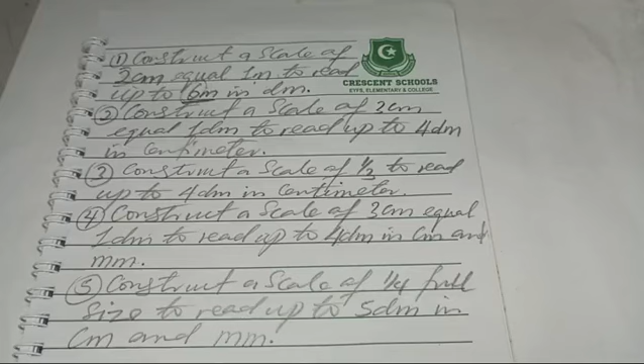In this video, we'll be solving question number 2 from the series of questions we started earlier. It says construct a scale of 3 centimeter equal 1 decimeter to read up to 4 decimeter in centimeter. So we have decimeter and centimeter, meaning it is a plane scale, and it can read up to 1 decimal place.

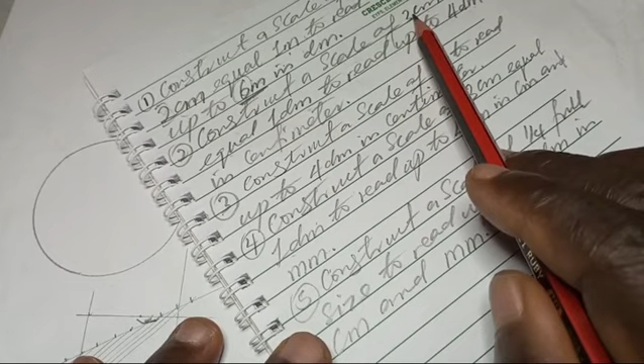The first thing we're going to do is determine the length of scale. The ratio is 3 centimeter to 1 decimeter. Ratio is equal to 3 centimeter to 1 decimeter - confirm again, 3 centimeter to 1 decimeter. Yeah, that's it. So therefore the RF, representative fraction, will be 3 centimeter all over 1 decimeter.

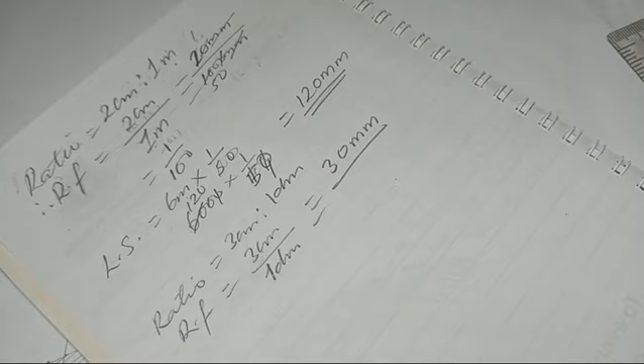Now convert everything to millimeter. This will be 30 millimeter all over 100 millimeter. So we cancel the 0s, and we have 3 over 10.

So what will now be the LS, length of scale? LS will be the maximum measurable length on the scale. What's the maximum measurable length? It says to read up to 4 decimeter, so this is the maximum measurable length, 4 decimeter.

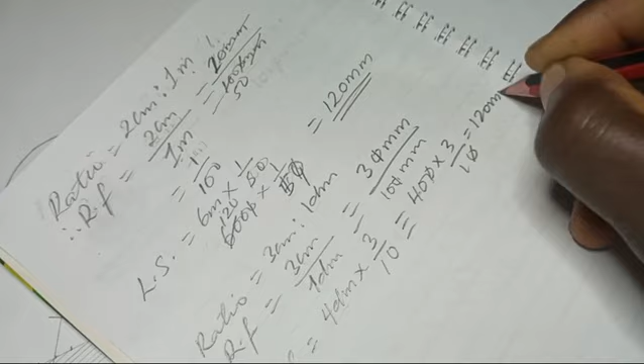So it will be the maximum measurable length on the scale multiplied by RF. That is 4 decimeter times 3 all over 10. Now convert this decimeter to millimeter - it will give us 400 times 3 all over 10. The 0 will cancel, so 40 times 3 gives us 120 millimeter. So the length of scale is 120 millimeter.

So let us go ahead and construct our scale now. The first thing to do is draw a line of 120 millimeter. I want to start from 19. From 19 to 29 will be... 100, 110, this is 120, like this.

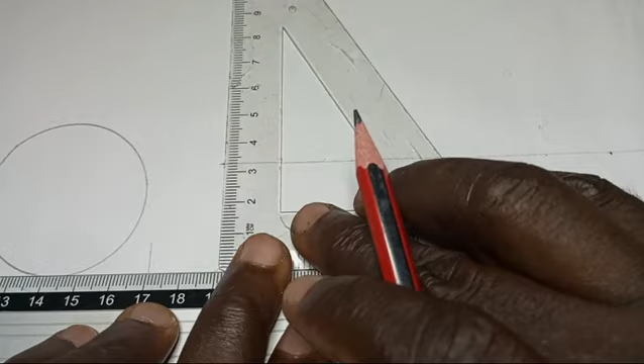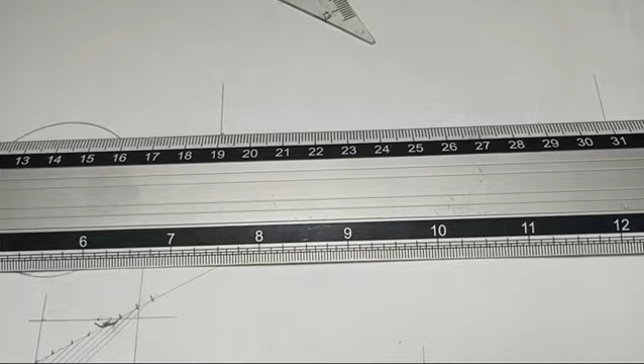Then I draw vertical lines from the two ends, with the aid of my t-square and set square. On the vertical line, I will measure 1 cm. I can use my t-square to draw it all through like this. So that's the length of my scale.

The next thing is to divide my scale into a number of parts. How do we do that? We go back to our question - it says to read up to 4 decimeter. So you now pick this 4, that's the number of places we are going to divide the length of scale into 4 equal parts.

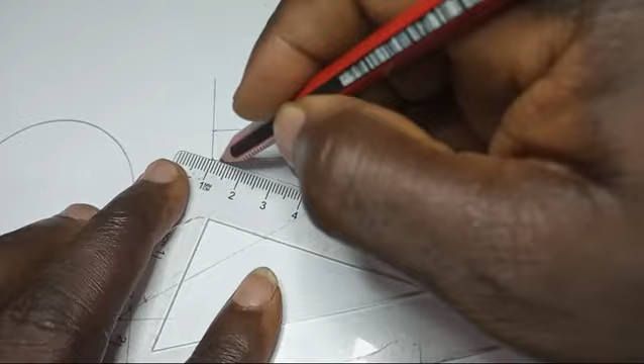To do that, I'll stay here like this, draw a line, I can measure: this is 1, 2 cm, 2, 3, 4. That's equal division in 4 places.

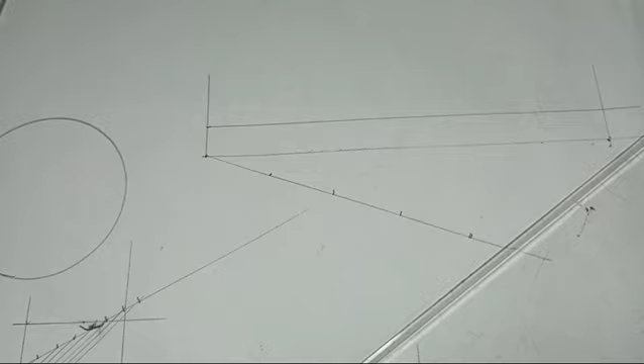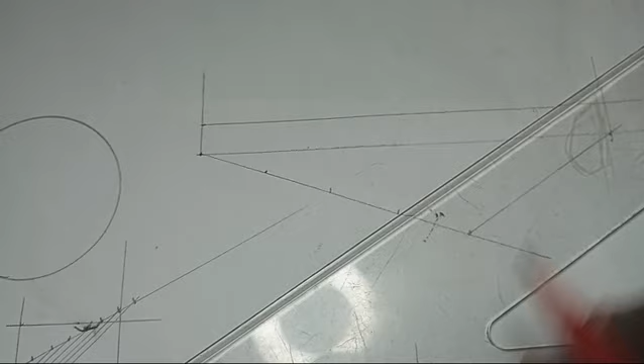So the last end, I'll connect it to the end of the length of scale. I'll place it like this, draw this one first, then transfer to the next point, transfer it here, go to the next one, transfer it here, and the last one, transfer it here. So I've succeeded in dividing the length of scale into 4 equal parts.

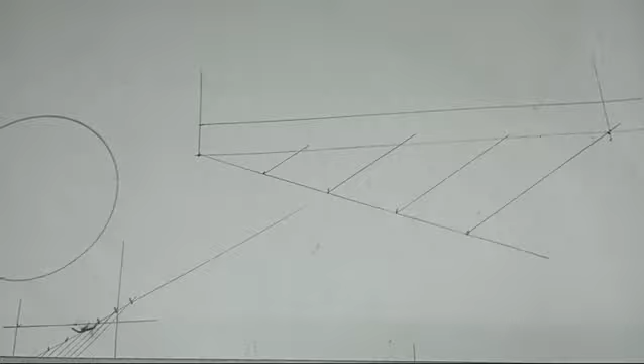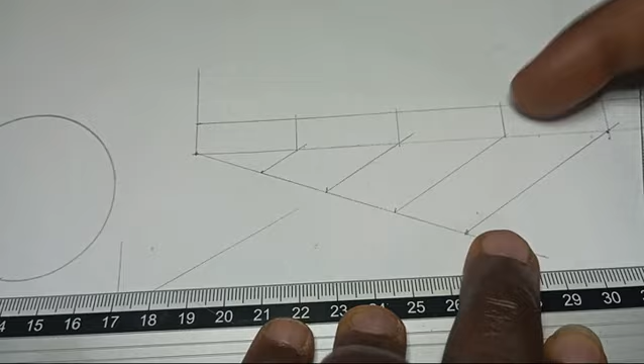The next thing to do is draw vertical lines from the points of division: 1, 2, 3, and this is the fourth one. So now that I've done this one...

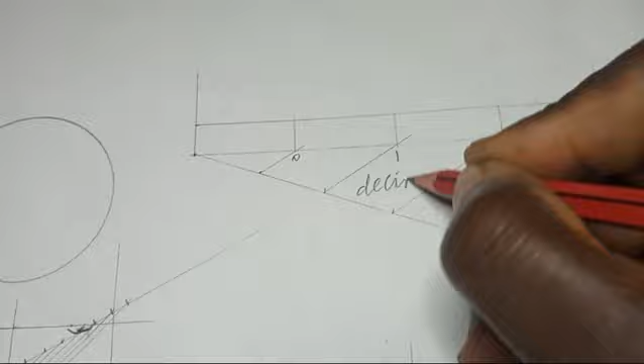Because the question says it is 4 decimeter in centimeter, the main scale is decimeter, which is 4. So I'll put 0 here, 1 here, 2 here, 3 here, and this place will be decimeter, and this one will be centimeter. From here to here is centimeter - that is 0.1 decimeter, 0.2 decimeter, up to 0.9 before you get to 1 decimeter.

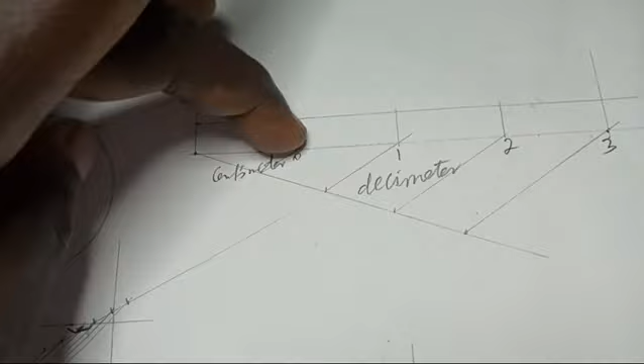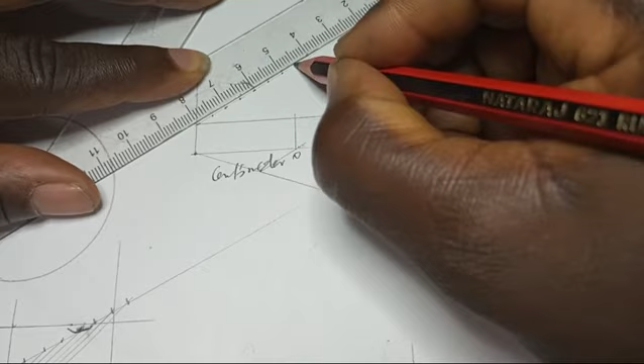How do I do this? I need to divide this one into 10 equal parts. So I'll draw another scale line here. This time I want to use 5mm: 1, 2, 3, 4, 5, 6, 7, 8, 9, 10. So that's 10 divisions. I'll now join the last one.

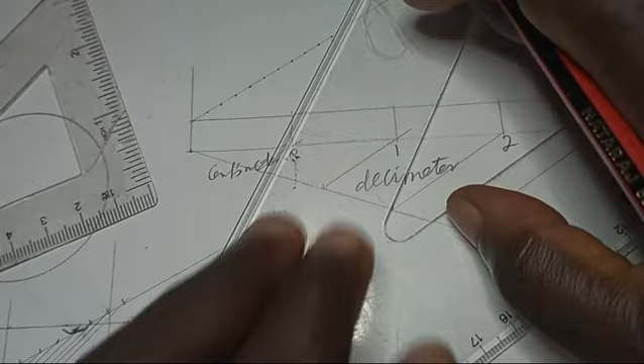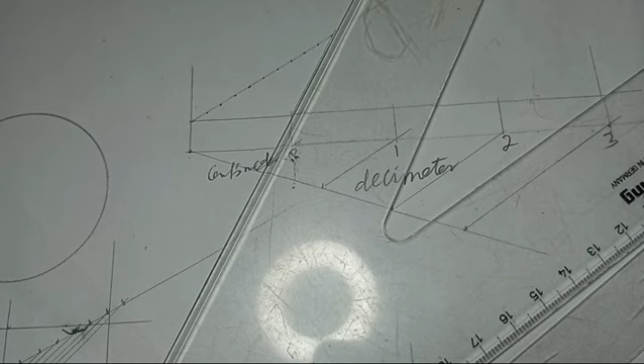To the end of the line that I want to divide, I'll join it like this. I'll connect this one and put my set square at the back of this one like this. I'll hold this set square very firmly, this one at the bottom, I'll hold it firmly. Then let me move the T-square, place it again, hold it firmly like this. Then I'll shift it like this, put it here.

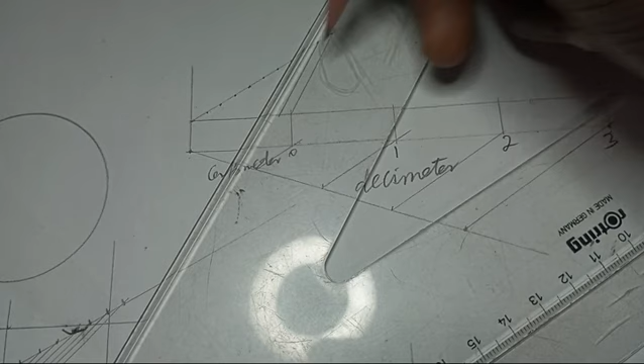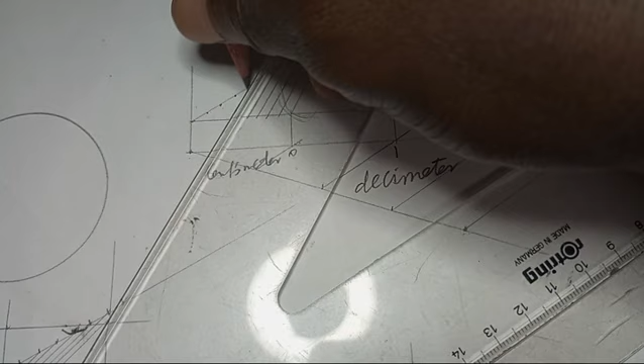Go to the next one, like this, to the next one, this, to the next one, this, to the next one. I have to be very careful, especially the set square that is under, not the one that you are sliding - the one under, make sure it doesn't shift. You hold it very firmly so it doesn't shift, otherwise your lines will not be parallel and will give you error.

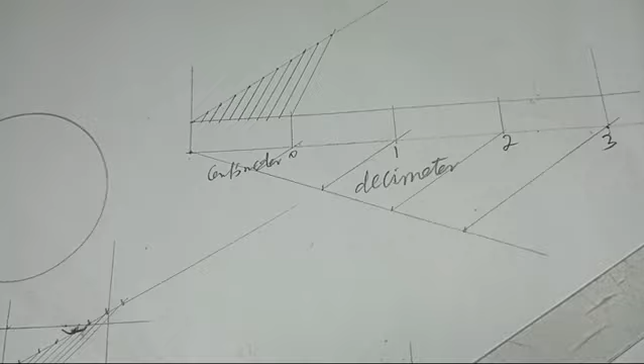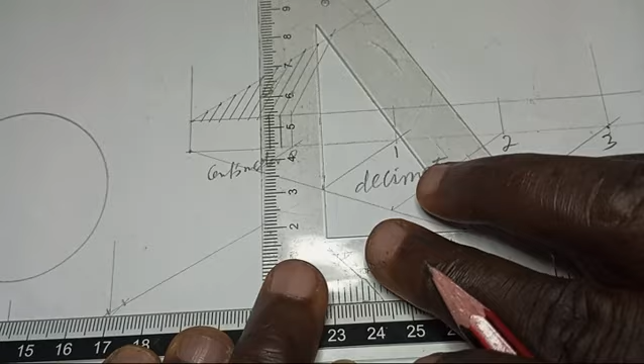And the last one, yes. So after this, the next thing is to draw vertical lines from all the points of division. Place it like this, draw vertical line, vertical lines, vertical lines, vertical line. Be very careful, very careful.

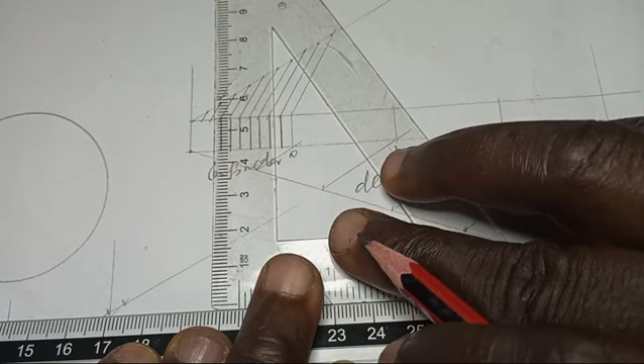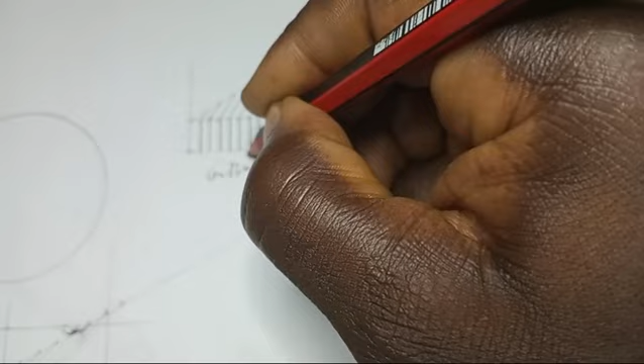So that is the division of decimeter, which will give centimeter. So now I have all my points. This is 1 centimeter, 2 centimeter, 3 centimeter, which is equivalent to - let's say this place is 0, this is 1, 3, 4, 5, 6, 7, 8, 9, and the last one is 10. So this will be 0.1 decimeter, 0.2 decimeter, 0.3 decimeter, 0.4 decimeter, all the way to the end.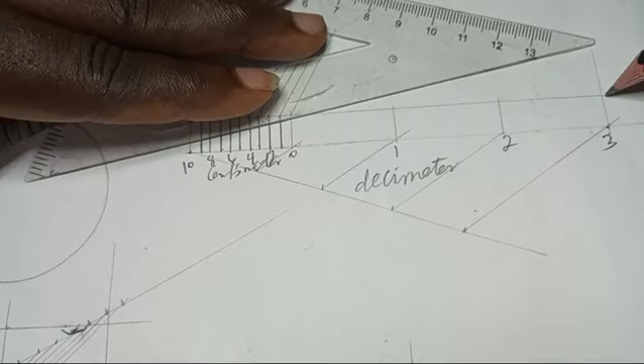So that is the way to design the scale. In order to make your work output neat, you can thicken your scale now - thicken out the outline of your scale like this, so that it can be seen very well. The lines you used in dividing the scale, you don't need to thicken those ones because they are not part of the question.

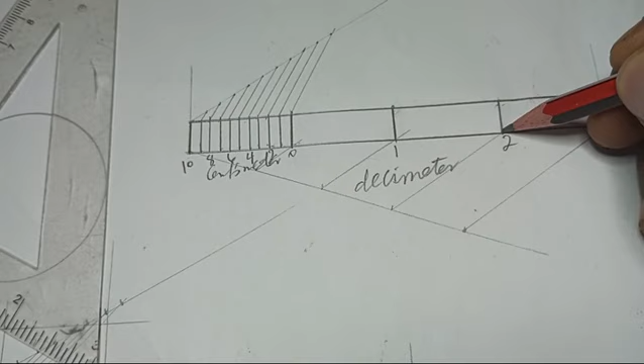So that's the solution to the question. You can be asked to use your scale to construct a triangle of any given length of side. For example, if asked to construct an equilateral triangle of side maybe 2.2, just get this point and count 1, 2 from here to here - just measure it like that. That will be your length, and use it to construct your triangle.